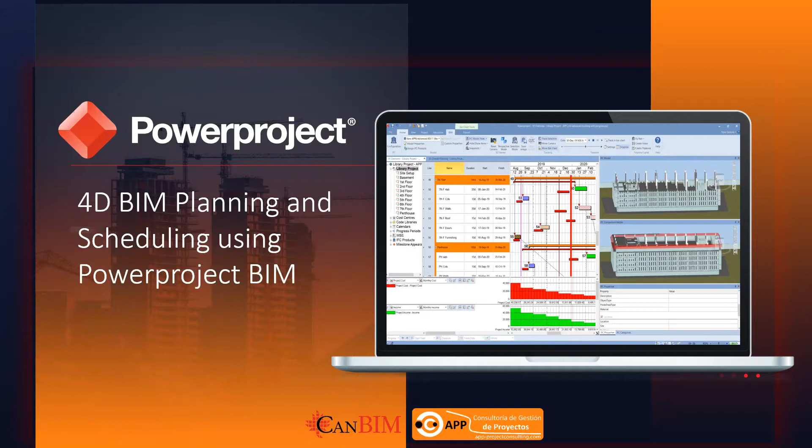So who we are and what we do - we are a project management consulting company. We provide project management solutions, including licensing, training, implementation services, consulting, and support services. We are specialized in enterprise project portfolio management, in 4D, 5D planning, in time chainage or time location planning, as well as schedule analysis, schedule diagnostics, schedule risk analysis, and life cycle facility data management.

Our headquarters is based in Madrid, Spain. However, together with our partners, we are present in North America, South America, Portugal, France, most of the African countries, and the Middle East as well.

Some of the project management solutions that we are providing - first of all, well you know, it's Oracle P6, so we are the gold partner of Oracle. We are the premium partner of Elecosoft, who are providing the Powerproject solution. We are also the partner of Trimble solutions, Vico as well, Ecodomus, and Deltek Acumen.

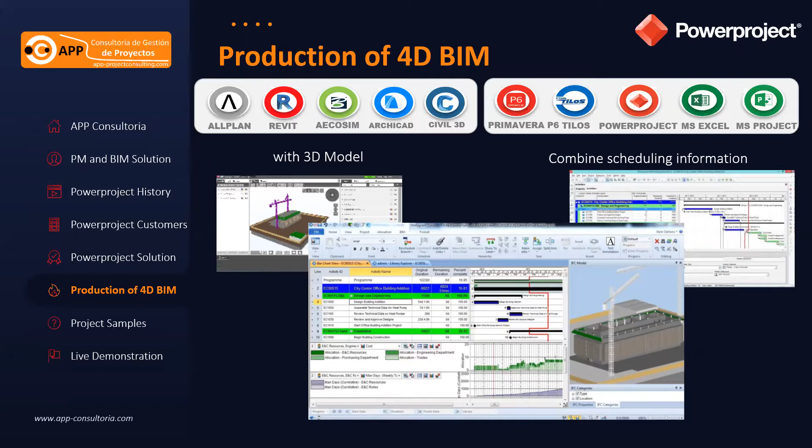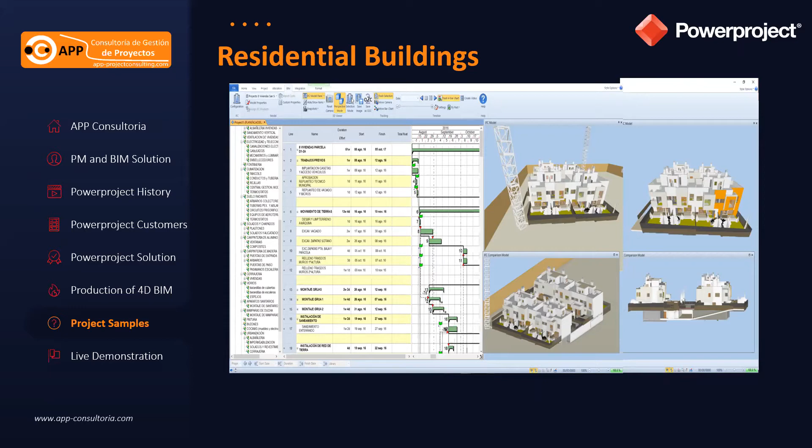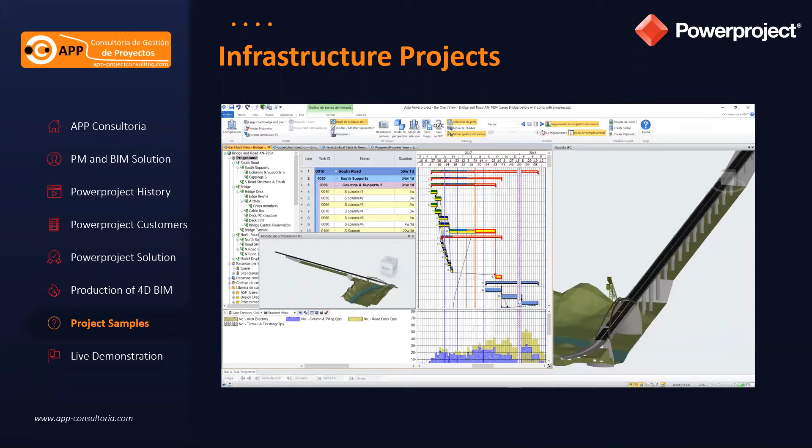Okay, so now some of the samples. In which project can you use the Powerproject? Well, I can say almost in every project you are able to use the Powerproject. Whether it's a residential building, whether it's some particular commercial building, or whether it's an infrastructure project, no problem with it. Once you have the model, for example, to do the 4D BIM planning, if you have a model, then you are able to use Powerproject, and you can bring the 4D BIM plan and schedule as well.

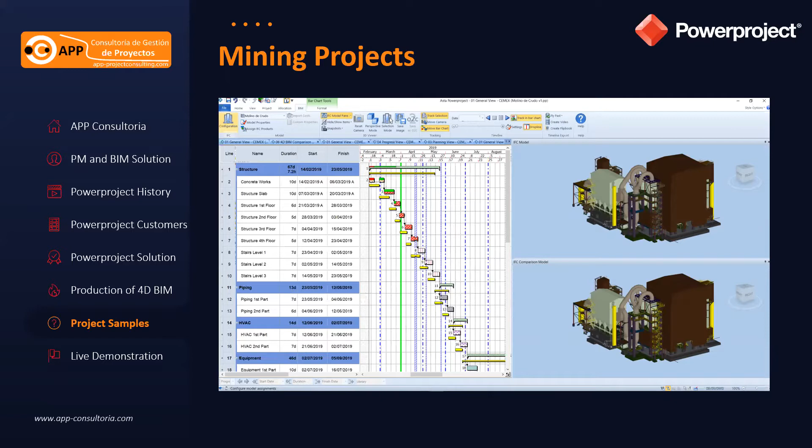Moreover, you can use it for mining projects. Right now, mining companies are starting to use Powerproject a lot, I can say, because we have articles in mining.com and in different public magazines where they have stated how powerful Powerproject is in using within mining projects. So if you would be interested to see one of them, just drop me an email, I'll be happy to share with you.

So what are the benefits of using Powerproject in 4D BIM planning and scheduling? First of all, what you can see is you are able to see the project structure. You are able to directly see and navigate among your project structures without any extra effort. So if you are the P6 or MS Project users trying to go around your project structure, it's kind of hard.

You are able to see all your activities with the standard view. You can have different spreadsheet information to display, like the progress percentage, schedule variance, and schedule cost performance index. Any information that you have on your schedule, we are able to show it in a spreadsheet view.

It's just a column-based system. The Gantt chart is very powerful and visually powerful as well, because you might have an unlimited number of baselines, but you can display around 10 baselines at the same time. If you need to, you can give different color codes, like activity codes. We call it in Powerproject the code libraries, in order to differentiate particular works, for example.

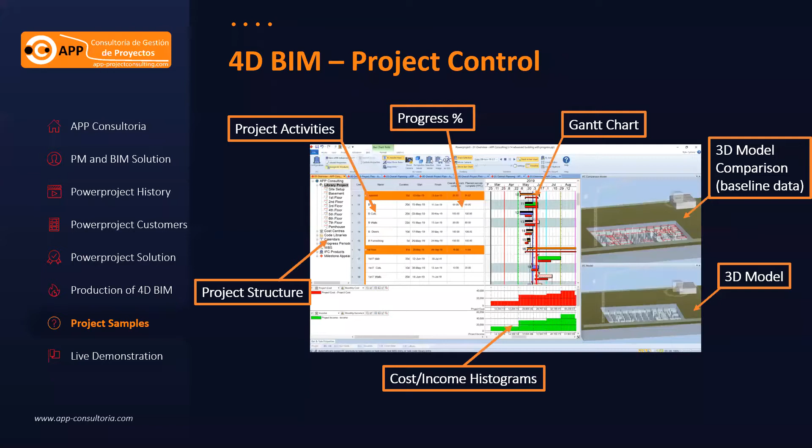So this goes through the whole cycle of the construction part. In Powerproject, you do not do the design. All right, so I hope it's clear.

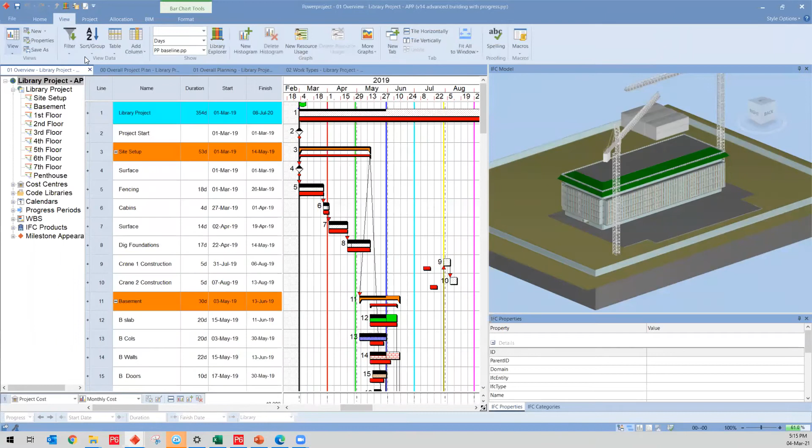The view part is the standard view, so you are able to go to different views in the same way, as well as add different information such as resource usage histograms and line of balance histograms.

In the project part, you are mainly setting up the baseline, your work breakdown structures, the unique ID information, as well as the risk analysis, network viewer, and the earned value reporter, so the S-curves, and you can also have the quality check. If you require the DCMA 14 quality check, it is available in Powerproject as well.

The allocation tab is mainly for resource allocation, and the BIM part, which we are going to focus on mainly, is all related to BIM. The formatting is simple - where you change fonts, colors, or hide or show some information. It's all available over here.

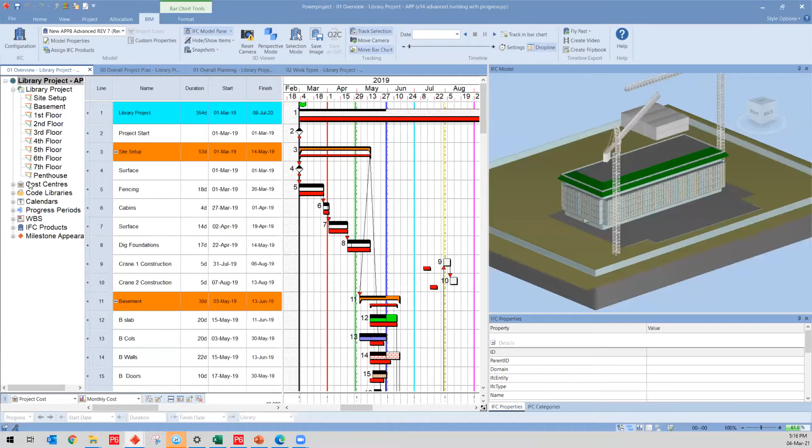Now let's go into the main part. On the left side, you have your hierarchy or WBS structure, where you can navigate very easily among those, or you can select, for example, the first floor and the second floor, and you'll be able to see all of them over here.

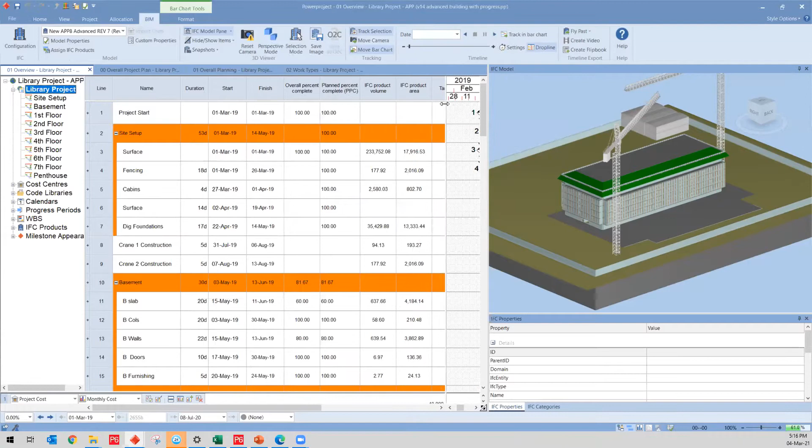Then, for example, we have our spreadsheet, so our spreadsheet has all the information that is required, which we want to show. If you want to add any particular column, simply go and add it.

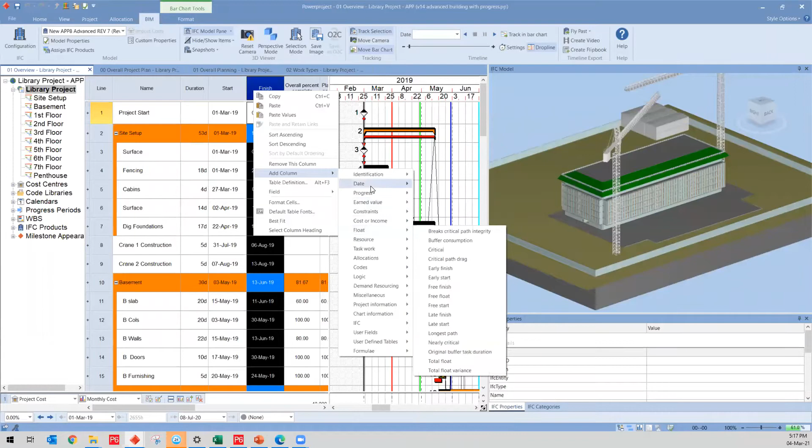Any different column which you would like to show. If we speak about the progress, you can have the overall percentage complete, the plan percentage complete, the duration percentage complete - all that information is over here. If it's about the earned value, you have the actual percentage complete, the plan percentage, schedule variance, schedule performance indexes, and so on. So any information that you might possibly want to display, you already have the columns for it. Here's our Gantt chart.

The lower lines, the red lines, are our baseline information. As I said before, we can display around 10 baselines at the same time.

Moreover, let's say we have a different column - for example, different data dates. In P6 or MS Project, you have only the cumulative one data date. In Powerproject, you might have a different progress period. So if you're updating the progress based on a weekly or monthly basis, you can set it up here and later track monthly or weekly what your progress was. So therefore we have this difference, but if you want to hide them, no problem, there is a possibility.

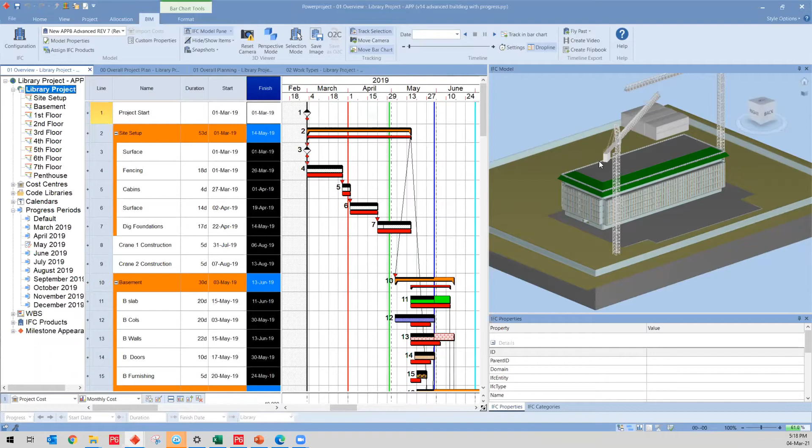And we have the model itself. As I mentioned before, we are using the IFC file format. Mainly if you're a Revit user, you're able to easily export the IFC file format and then bring it into Powerproject, and combine your schedule or create the schedule directly from the model, if you would like.

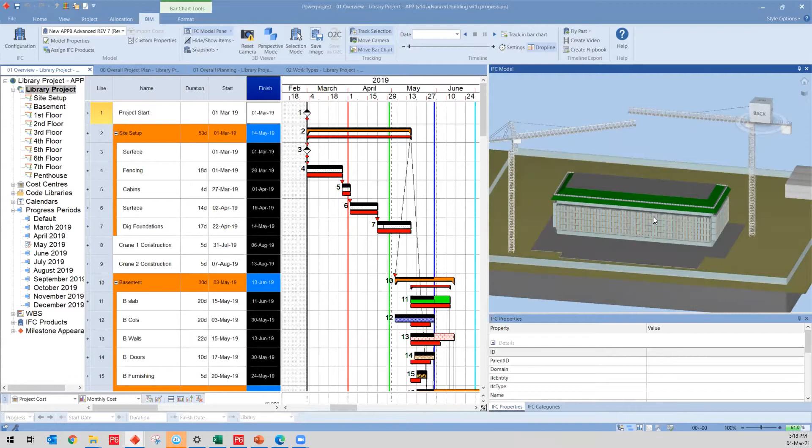So what else can we do with the model itself? There are many things that help us do proper project planning using the 4D BIM methodology. One of the things we use in 4D BIM planning is taking the quantities that have been assigned in the model and using them in the schedule.

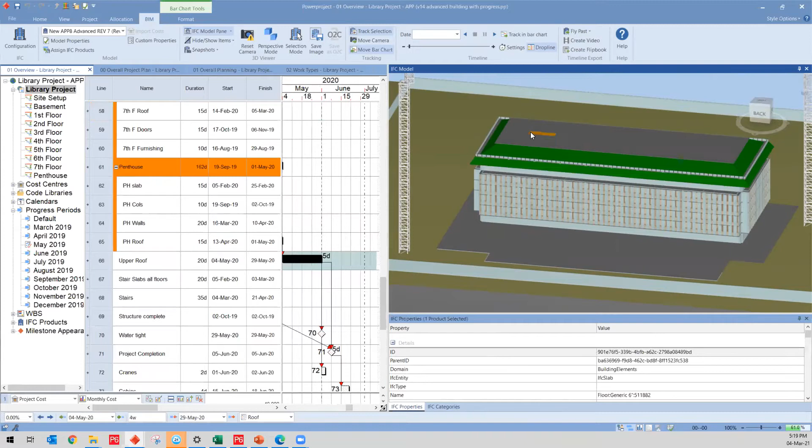For example, if I select one particular element, in the properties I will have the information - what is the entity ID? So this information, the name, type, object, comes from the design software. If you have filled in this information in the design software, it will appear over here as well.

However, one of the important parts is the calculation. The quantities - the calculated quantities - is important information that we are going to use in the 4D BIM planning.

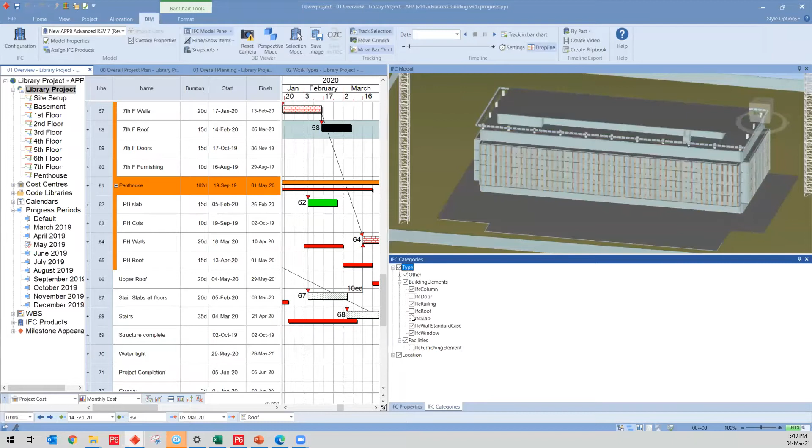Moreover, what we have here are the categories. This is the category information where you can hide or show a particular element. If you're not using it, just hide it and it will not appear in your 3D model view.

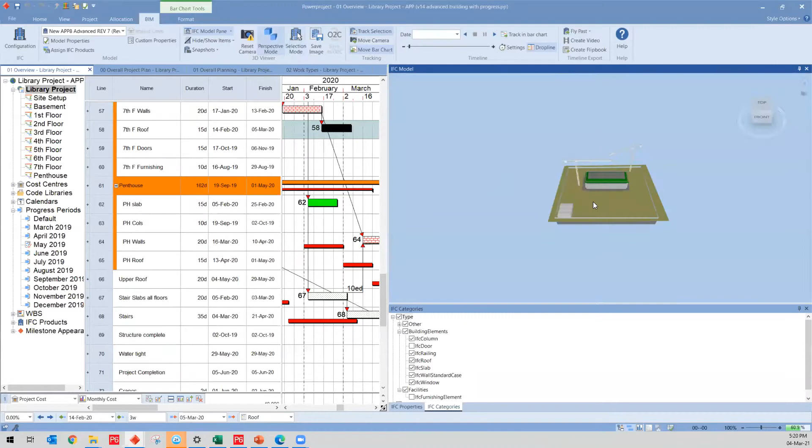So we have different modes. For example, you can go over the model itself and have a look at it. Moreover, if you want to go inside for detailed planning, you can go inside your building, select a particular element - for example, this column - and check it: what is the property, what is the quantity being used, and use it in your schedule.

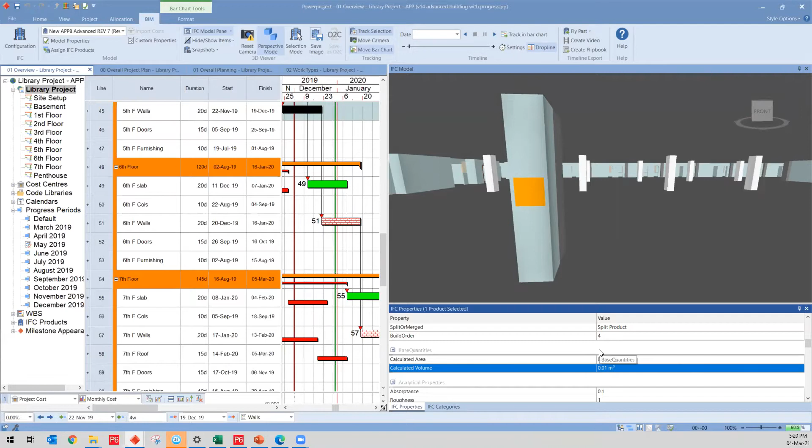Of course, all the data we can bring into the spreadsheet and then use it to get the productivity rate or the work rate for it, or find out what the work rate is if we have a particular time period limit. I'm going to demonstrate how we can do all of this.

Now, another thing you'll want to learn is that we are able to save images. If we would like to save a particular image, simply save the image over here, and you can have a different type of format, however you want. You might use these images for your narrative reporting, for your progress update information, or you can save a snapshot - the snapshot is possible as well.

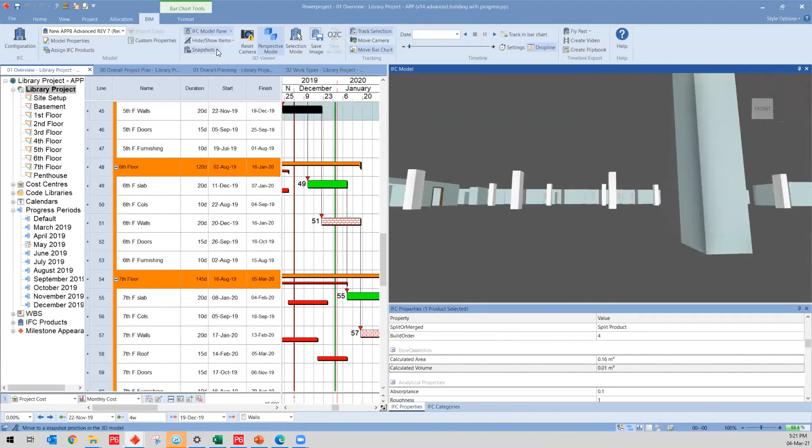Snapshot is a position of the camera. For example, if I would like to say this is the interior, I would label it as the interior, then take the snapshot. Another one would be the exterior.

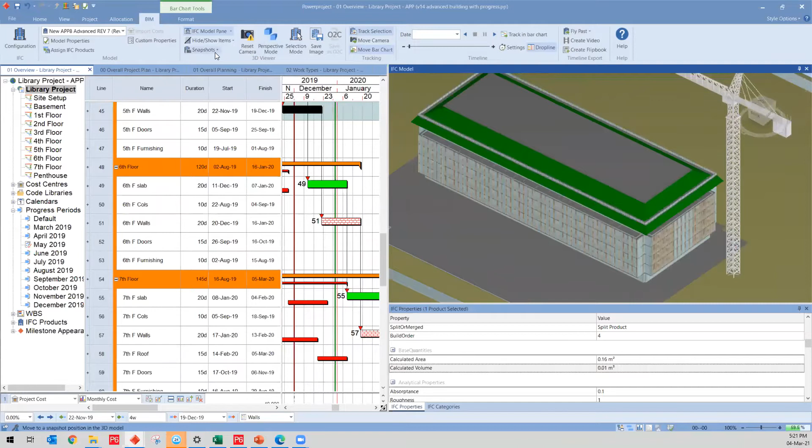Okay, so the exterior. Whenever I need to go back to the interior part, I can just move directly from here. If I need to go back to my other view, I can go there as well. So the snapshot is saving the position of the camera. Later on, whenever you need to adjust something or you're working on a particular floor level or in a particular area, it helps you very easily go to that point.

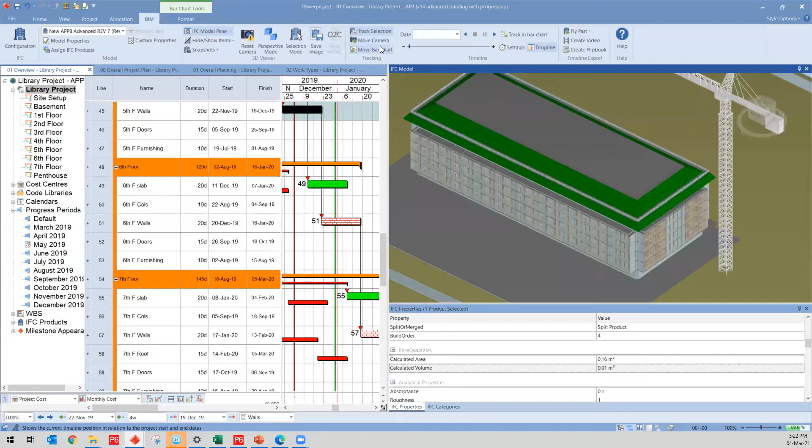Different other options, like during the simulation, when you are running, if you want the camera to move or you want to track your activities based on the elements that you have selected. For example, I have selected the upper roof and now my activity has been selected as well. Currently my schedule is linked to the elements of the model.

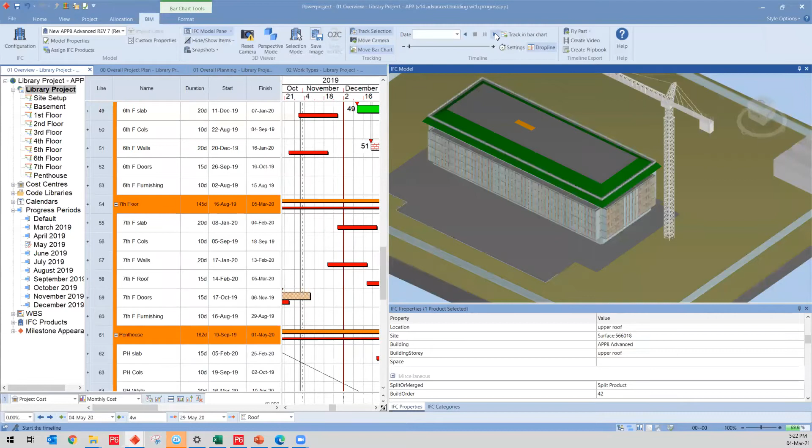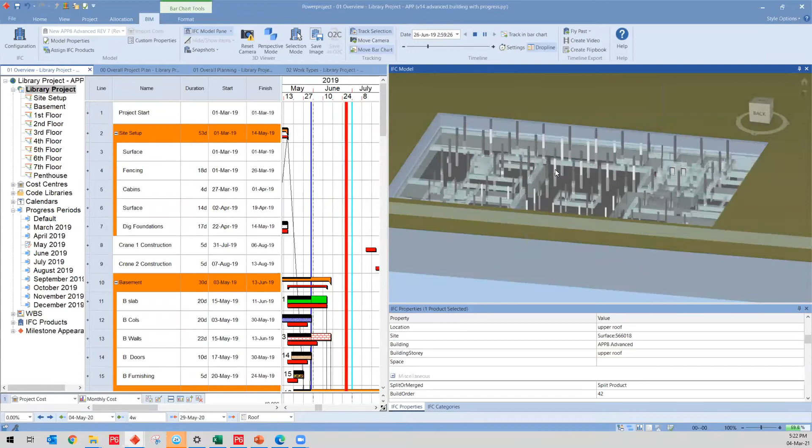If I want to run, for example, the construction cycle simulation, you can see over here how it is going, so it's based on our schedule. We have a drop line which indicates the particular time period that we are on. You can see how our construction schedule is done, so we can simulate our construction work and we can visualize it.

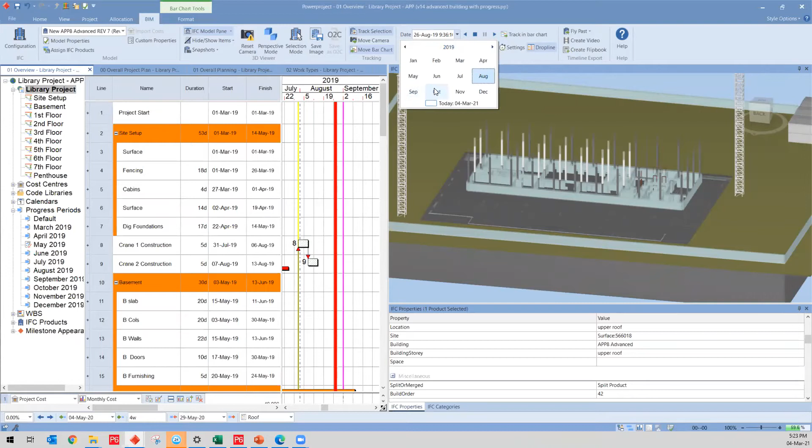Moreover, let me just change this one over here. If we want to see in a particular time period, to forecast what will happen, in which stage we will be if we are at the end of October. If I would say, at the end of October we are going to do that work, so we are on the 4th floor, we are in the middle of the slab of the 4th floor, and we can see in which elements, and visually we can see where we are right now.

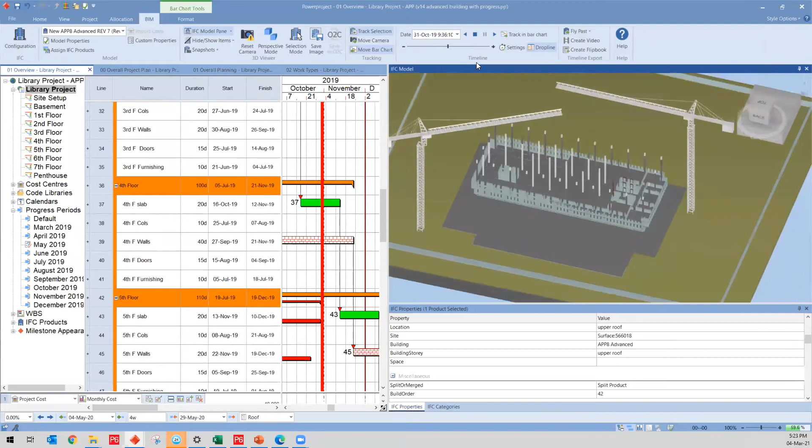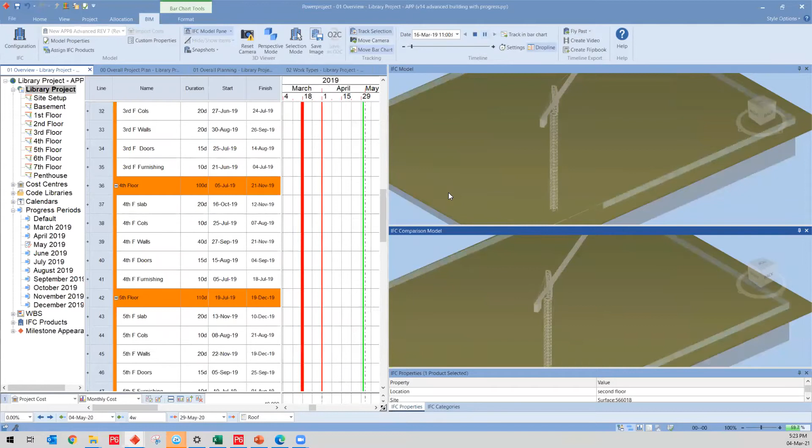Moreover, what else can we see here? As I said, we have baseline information, so I'd like to show the comparison view. As mentioned before, it takes the data from the baseline. Let me move to my IFC comparison view and make it a bit more visible, and let me run the simulation. You will see the difference between the planned and the actual ones.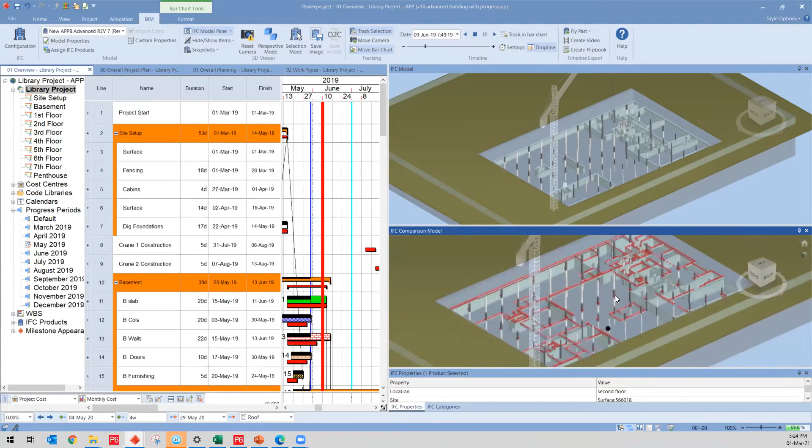If you pay attention on the comparison view, the red highlighted elements mean that those elements are delayed. According to our baseline, we're already supposed to do those elements, the first floor, the surface part. So these elements, according to our baseline, have already been supposed to be started. However, on our actual plan, we don't have them, so it means that we are delayed. The comparison view shows us the baseline versus our planned information.

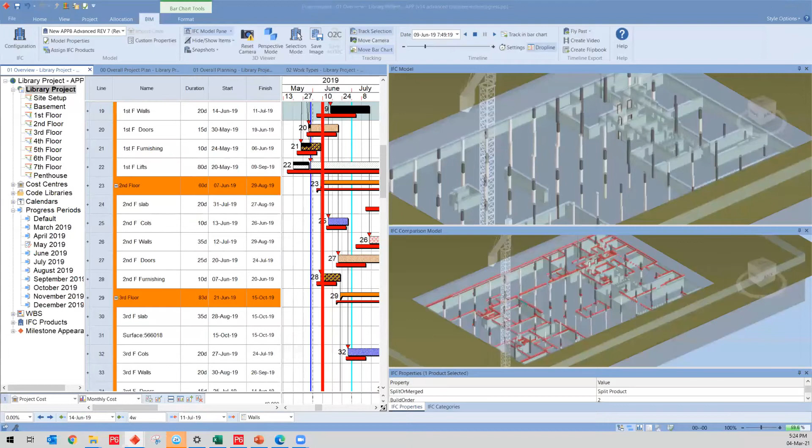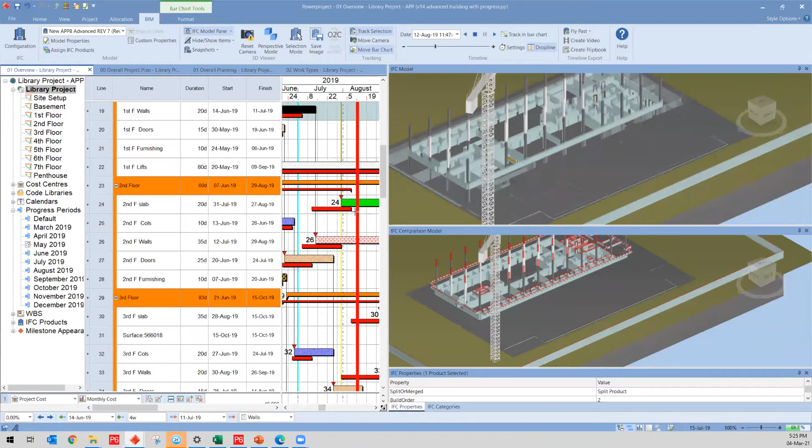Let me run it further so you can see more clearly. I'm also mentioning that you can track this difference in the Gantt chart as well, so you can see the difference there. It's quite simple in every CPM solution to do this. However, using Powerproject, you'll have the visual information as well, showing where you are delaying and in which activities you are behind. Okay, so this is the first part.

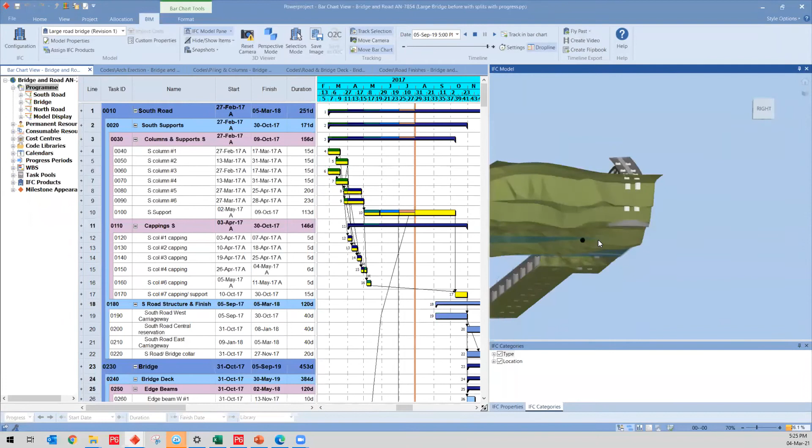Let me show you another sample. This is the sample for the infrastructure project. You can use Powerproject for any type of project, whether it's residential, commercial, infrastructure, or mining projects, no problem with this one as well. Once you have your Powerproject and once you have your 3D model, go ahead, use Powerproject, do the proper 4D plan, and see how it will help you in your project.

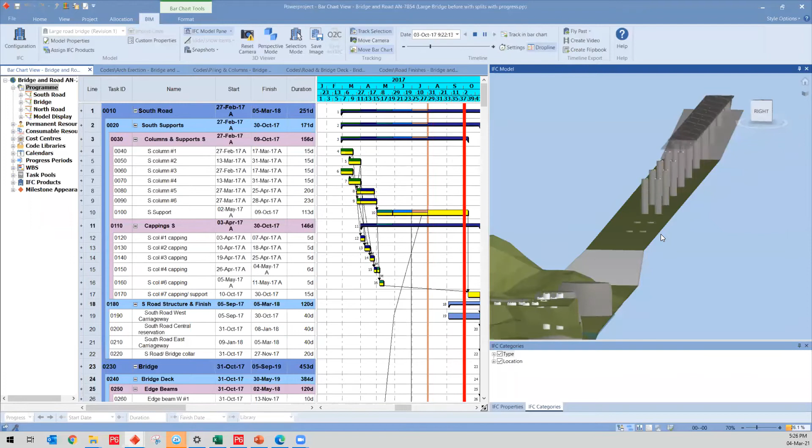Meantime, we have some questions already. Abdul is asking what is the difference between P6 and Powerproject.

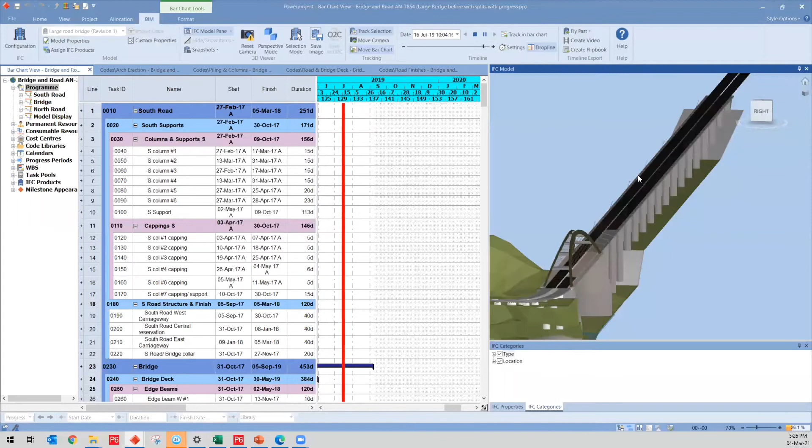There's a lot of difference between P6 and Powerproject. First of all, I'm a user of P6 as well, I love P6 and I have respect for P6, it is a market leader currently in some countries. So it's hard to say in a particular way what the difference is between P6 and Powerproject. Well, first of all, Powerproject has additional modules such as risk analysis, line of balance, 4D BIM, as well as the insight.

Moreover, it integrates with other solutions. If you would like to bring your schedule from the XER file from P6, you can bring it into Power Project, or if you want to send it back to the XER file, you can send back your schedule too. It also works with MS Project. So you have the MS Project file, no problem, you can bring it into Power Project, or send it back to the MS Project information.

It has advantages over P6 in resource management and cost management. For example, in cost management, you can show not the negative cost like in P6, but you can show the direct income of it. There are many aspects we can speak about regarding the difference between P6 and Power Project, but those are mainly what I mentioned.

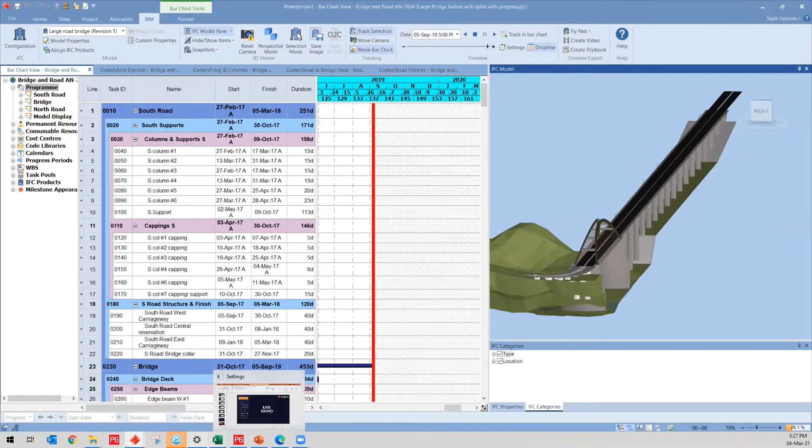Okay, so now let's move forward. Let me show you how we can actually bring the schedule in. Let's say I would bring the P6 schedule. As I mentioned before, you are able to import and export back to the native P6 file or MS Project file. So I can bring, for example, the P6 file. Let me find one XER file.

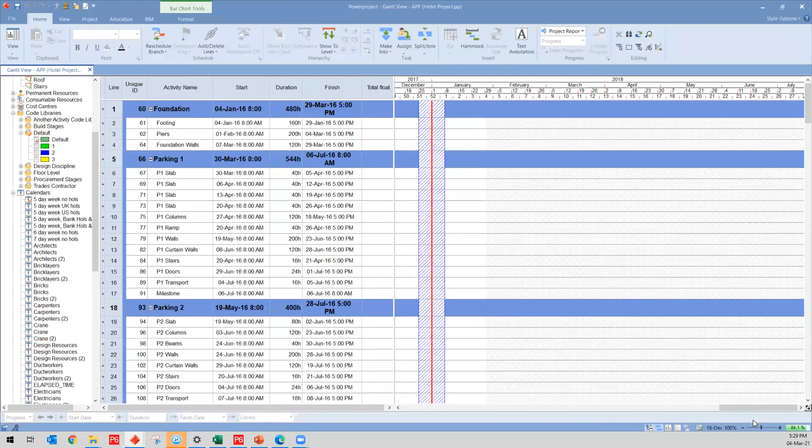Okay, so now Power Project is importing the P6 XER file. As you can see, all the information you have in P6, you have in Power Project as well - the calendars, the WBS structure, the resource information. Whatever you have in P6, you can bring it to Power Project, no problem with it.

Okay, now that I have my P6 schedule, what I need to do is bring in my model itself. To bring the model, we go to the IFC configuration, and from here we import the model. You can use the local computer, or you can use the Eleco BIM cloud. The cloud is if you would like to store your IFC model in a cloud, so you can use the Eleco cloud. However, mostly planners and schedulers keep it all locally.

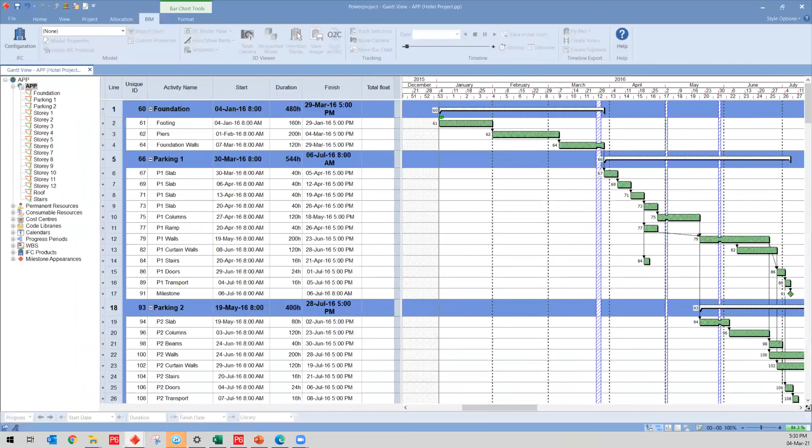So I can just open the IFC file. This is the IFC file format, and what I just did is import it into Power Project. Once I open the model, it will load the model. I have already loaded the model right over here. So this is my model, and we have all the information which is inside the model right here.

Okay, so if I select a particular element, this is the footing, a structural element with the name IFC footing, and we have information such as, for example, quantity information too. There's no problem, I can use this one later on.

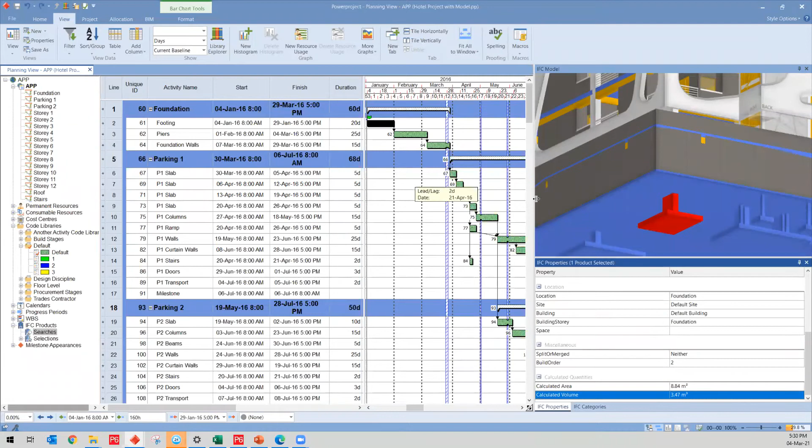Okay, so let's say I have imported my schedule and brought in the model. What can I do with it in order to create the 4D plan? First of all, you have to link it. So how do we link? There are several ways to link the model.

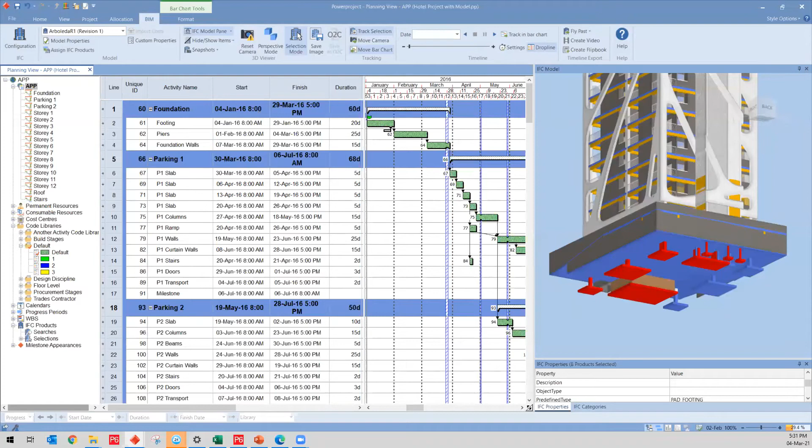The first one is the selection mode. You can select the elements - let's say this is the footing. So I'm selecting the footing, and then simply drag and drop it to my activity. I can just drag and drop it to the Gantt chart. So right now, if I unselect it and select my activity, you can see that my elements in the model which I have linked are already selected.

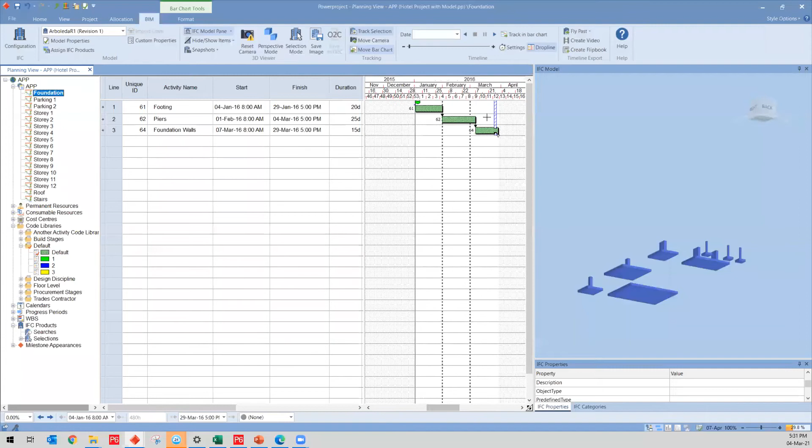Okay, I want to see only this activity, so I can go to the foundation part and show only this view. So right now I have my three activities, I have linked only to the footing, and you can see the elements in the model that I have linked over here. This is one way - the drag and drop option - to link your activities with the model.

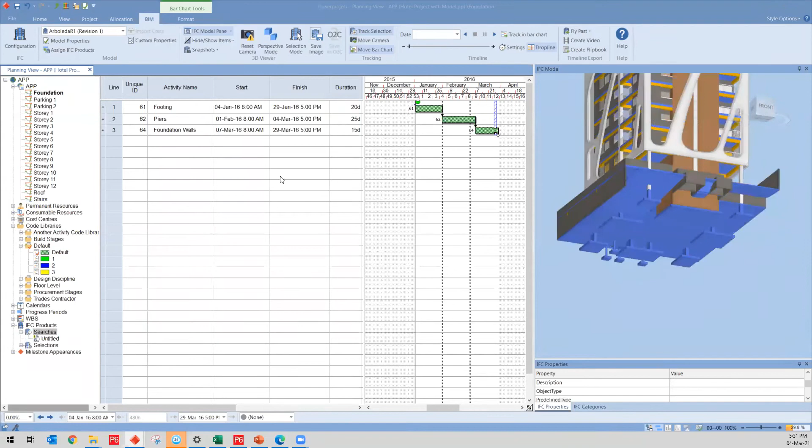Another way is using the searches. So what are the searches? Searches is a kind of automation of your work. For example, I'm looking for all footings, so I'll say footing, and I'm giving the search criteria. I'm searching by the property, which is the IFC entity. I know this is my footing, so for example, here we can check it. IFC entity named footing. I have selected and need to select the footing one. Now I have given the criteria to search.

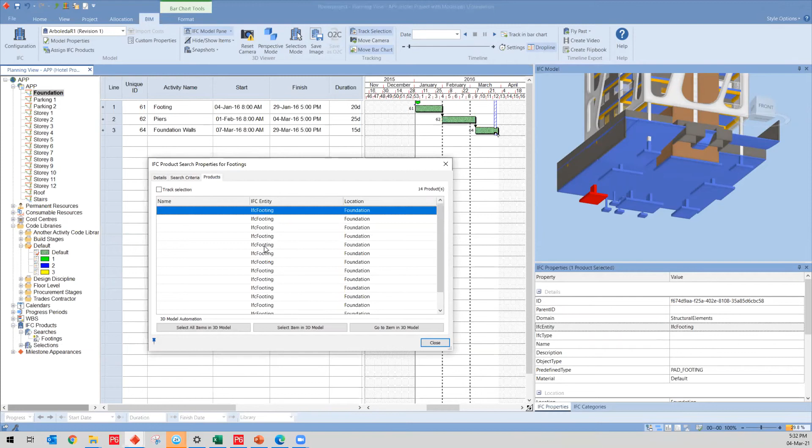And if I want to see which product right now falls under this criteria, I can select all elements. All elements are being selected right now, and simply I can drag and drop and override IFC product. Once I select, you can see right now that my element has been linked to the activity.

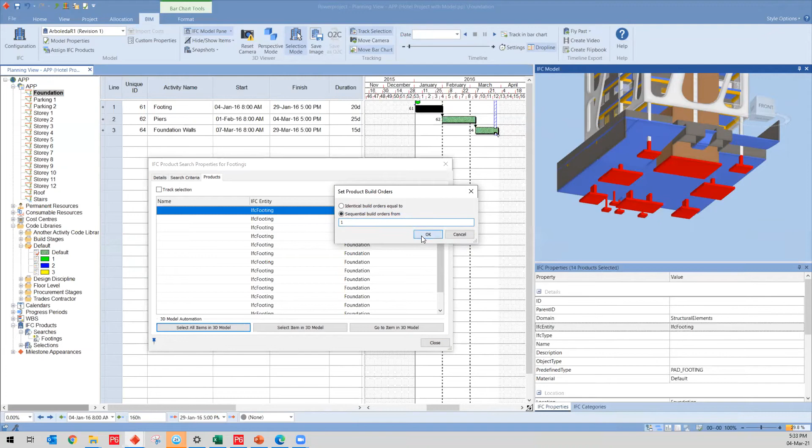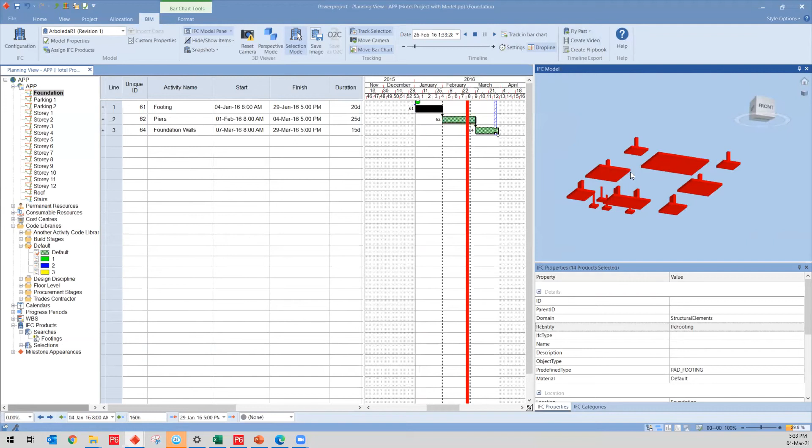What else can we do with it? Well, one simple way is to do the sequential build order, or you can give your build order manually, no problem. So if I run my schedule, you can see how it is going to be constructed. All these building orders you can do manually. You can set up which particular footing should be constructed first and which one should be last. It is all possible to do this.

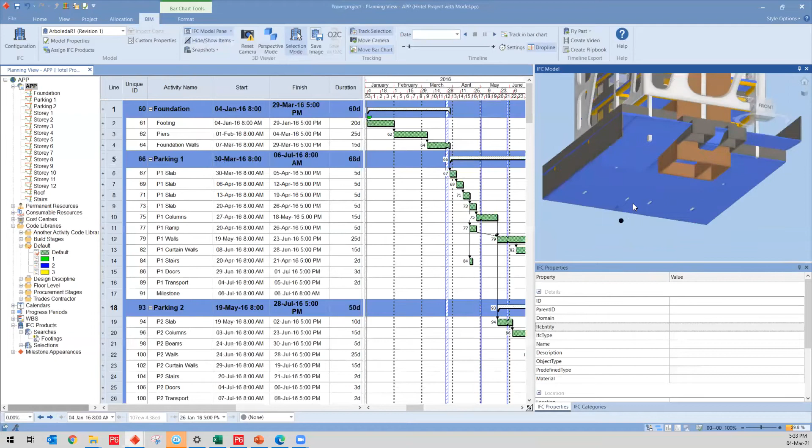Now, let's say you have selected the elements and done the schedule. How will you check whether you have missed anything during your work? There is a way: show the unscheduled products mode. This means Powerproject has removed those elements which are already scheduled.

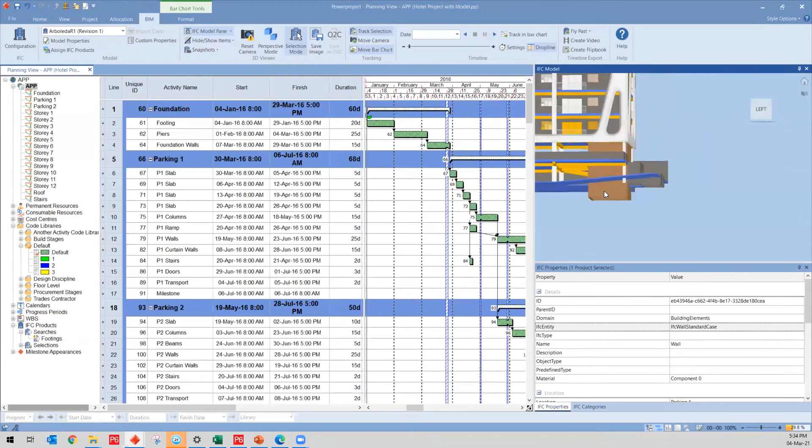For example, let's say I have a wall and I will just drop it. I will select it and drop it. This is the parking, and I will put it over here, so it disappears. This is also very good in order not to make any mistake during your planning. So this is the way, it's clear. Another way is, for example, I will just delete all the activities. I don't need any footings, and I don't need any of this.

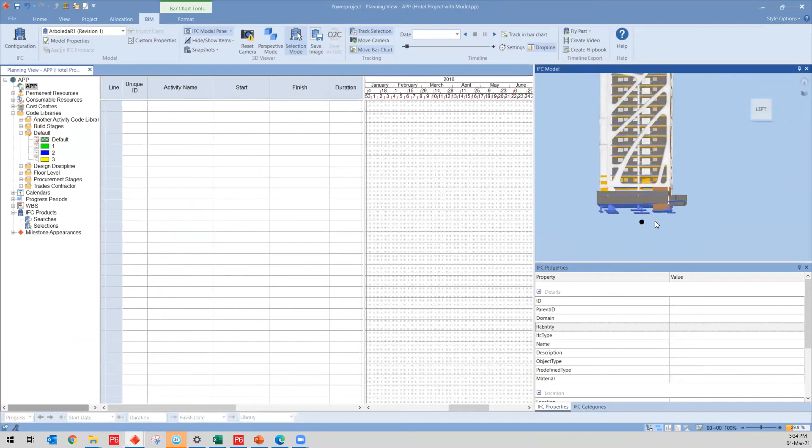So assuming that we don't have a schedule and we only have the model itself, how can we create the schedule? There are a few ways. First, you can simply draw the activities on your Gantt chart, saying this is the footing, this is the foundation, and so on.

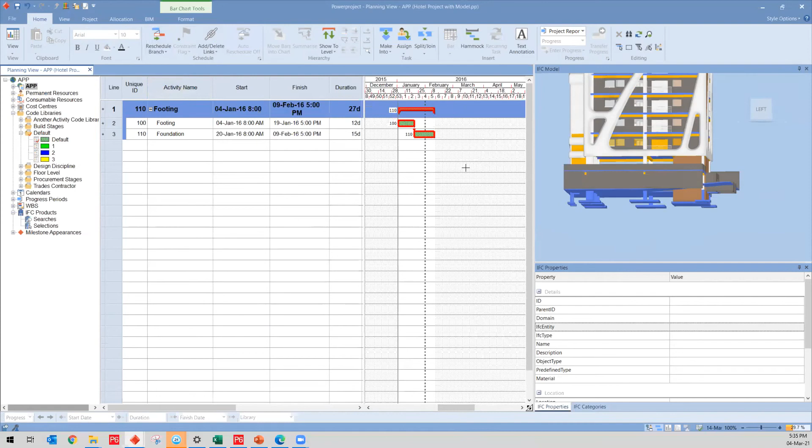Then you can give it as a summary, this is a footing or the WBS example. Now link it, and it's done, and you can reschedule your project. So it is rescheduled, of course it shows as a critical activity, no problem. And then you can link your elements with the model directly. So this is one way.

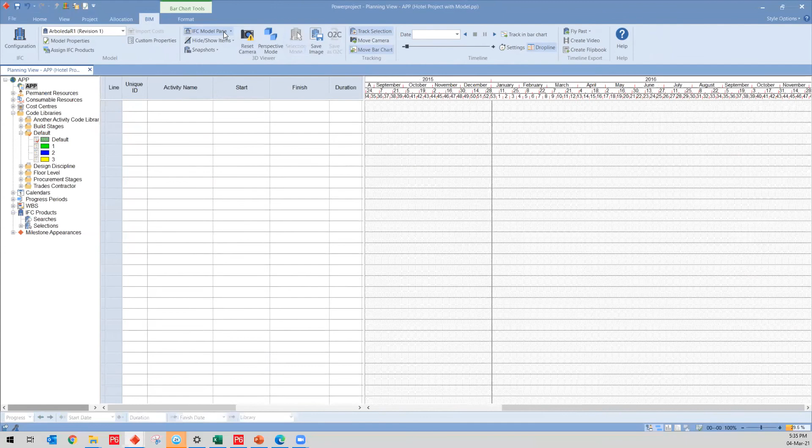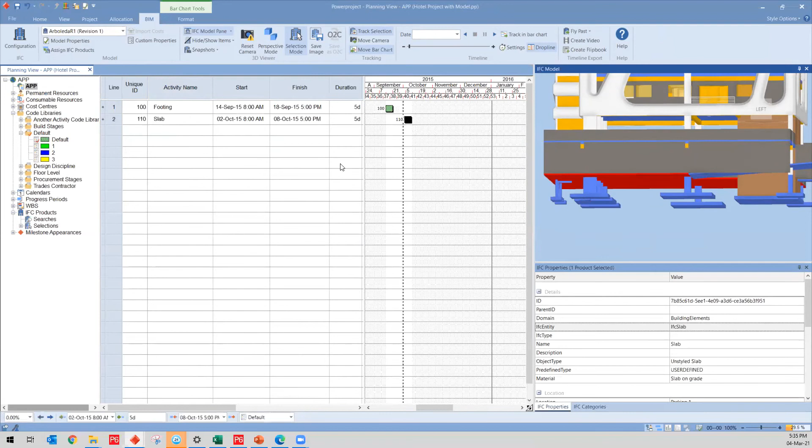Another way is, if you show all the elements, you can go to the selection mode. You can take those elements and drag and drop them directly to your Gantt chart, then give the name that this is the footing. Then you take another element and drag and drop it, this is the slab. Then you have another one, and then you have the wall. So this is also possible to do.

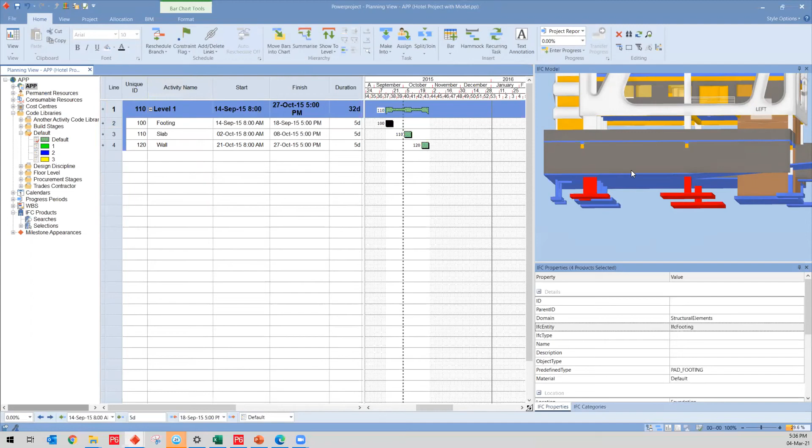Then summarize it, make a WBS structure, saying this is level 1. If you want to see the footing which you have selected, you might have a lot of elements, but if you want to focus on this particular element, simply go and show only the selected task, and you will be able to see it. If it's a slab, for example, you go again and show only it, and you'll be able to see this element. Of course, you can also split the product.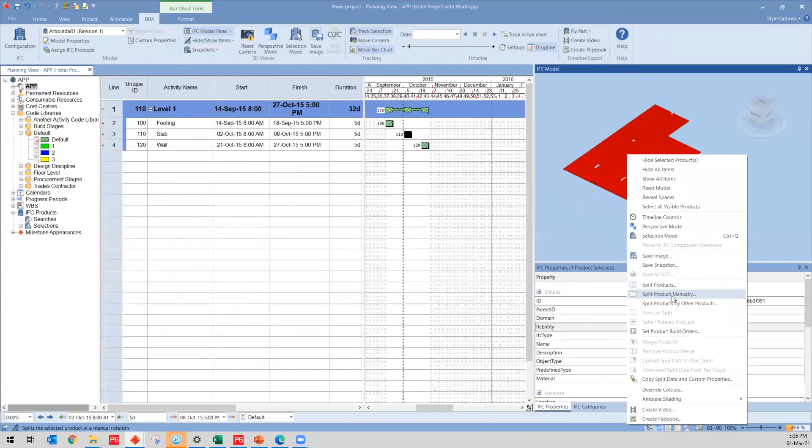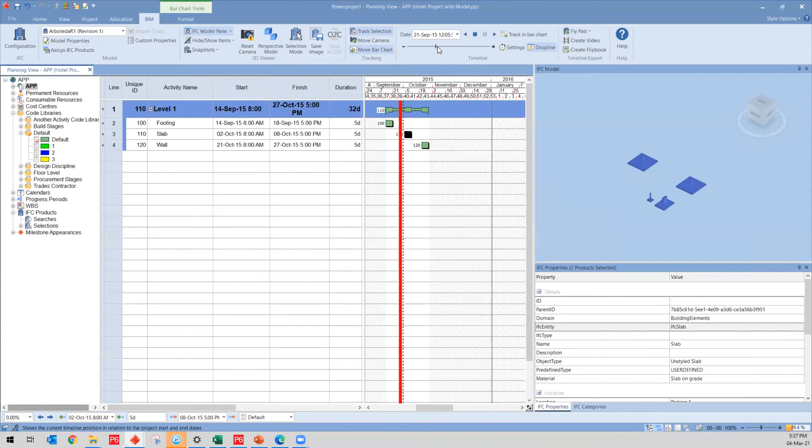This is very important, especially when you have columns and walls, to do the proper sequence and visualize it properly - you can split the products. You can do an automatic split, so Powerproject can automatically split it, or you can split it manually as well. Once you split it, you update it, and let's run the simulation and see how it is. Let me move my simulation right over here so we'll have a better view.

Okay, that's great. Now, one of the things that is very important in Powerproject: even though I would reschedule it, I can always undo the reschedule.

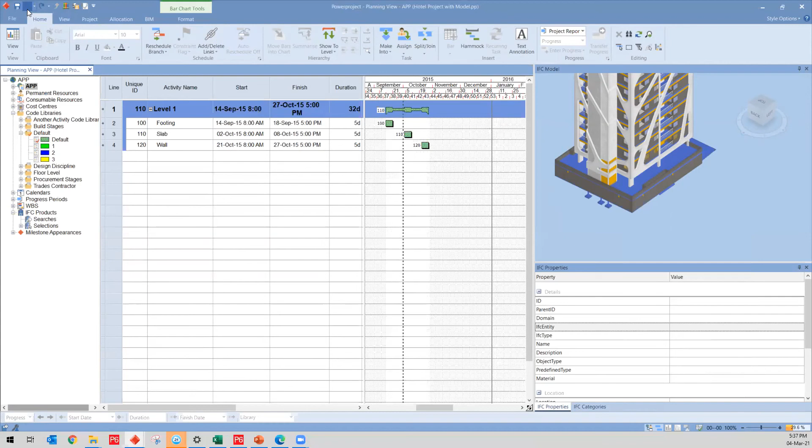So it helps us do the what-if analysis. If you want to undo the reschedule, you can simply do it without having saved another version of the file before and after the reschedule. It really helps a lot, and you can do unlimited numbers of undo operations.

So this is a very, very powerful solution. As you can see, I just undo it until I've removed, until I deleted my P6 data.

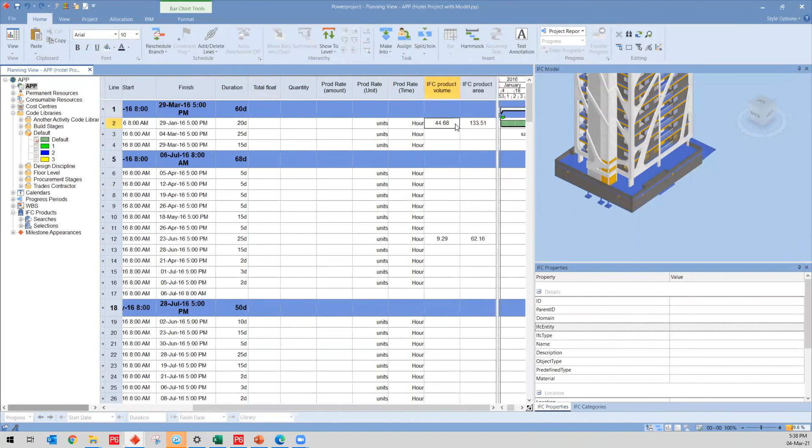I mentioned one thing about using the quantities from the model, and I'm going to show you how we can effectively use it. If you pay attention, we have two columns, the IFC product volume and IFC product area. Those quantities are coming directly from the model itself.

If I select, for example, all my footings, you can see that I have an identical amount of quantities as in my model. Now what I can do with it is copy it and paste it to my task work.

So this is not this one, let me just add one column. Okay, I have it over here, so I don't need it, I can just put it back right over here. So I'm using this quantity right now, which I have taken from the model.

In the model itself you're not able to edit it, but you can edit it during your working. So the task work, which is related to the quantity, you can relate it. I can say that this is not the unit, this is cubic meters, so it automatically changes to cubic meters.

I can say, okay, what is my productivity rate? If my productivity rate is 5, my duration information changes automatically. I'll make it more visible - now if I set it as 2, you can see how my duration is being changed.

What if, for example, we have a particular requirement to finish the footings in 5 days? What should be my productivity rate? If I highlight this productivity rate, it's saying that in order to finish 44 cubic meters in 5 days, your productivity rate should be 1.12 cubic meters per hour.

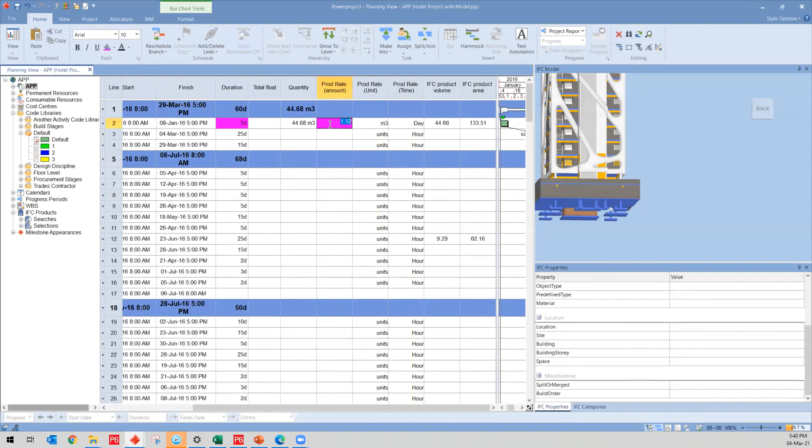Or you can say, alright, let's see the per-day information, and put for example 2 - it changes the quantity and changes the duration information automatically.

Or you can simply manipulate or change the information directly on the Gantt chart. It indicates the task work - task work is our quantity, task work rate is our productivity rate per day - and it also shows you the duration.

So if I would like to finish this in 50 days, my productivity rate should be this.